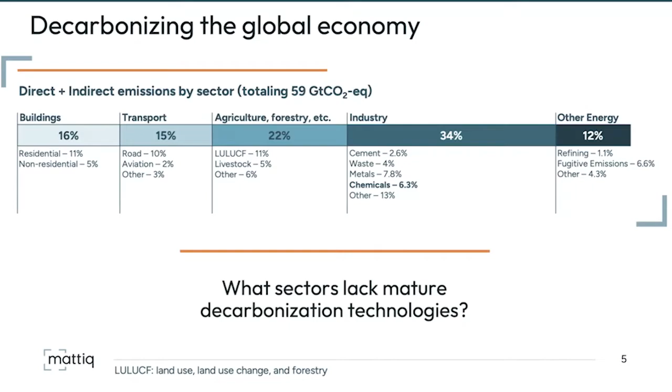So today we're gonna use green hydrogen as a case study and a benchmark for how electrification concepts and technologies can be learned from, built off of, and more broadly applied to decarbonization, specifically within the chemicals industry. As many of you know, green hydrogen, or hydrogen produced from renewable electricity, has seen tremendous growth over the past decade. And we view this massive growth in hydrogen as a precedent-setting technology that we can learn from and build off as we continue to expand decarbonization efforts within the industry.

And just for some brief background, the hydrogen markets today are massive, with about 100 million tons of hydrogen produced each year. Yet about 95% of the world's hydrogen is still produced by steam methane reforming. And steam methane reforming alone accounts for nearly 1% of global CO2 emissions, which is a huge number. Yet over the past decade, there have been massive investments from the private sector and from government agencies worldwide to increase the global market share of green hydrogen relative to gray and blue hydrogen, the dirtier forms of hydrogen.

And domestically, the US has poured resources into building the hydrogen economy, from infrastructure to technology, with policies such as the Inflation Reduction Act and the DOE's Energy Earthshot program, which highlights hydrogen as one of only 7 critical energy-related technologies for decarbonization. The technology of water electrolysis has a very long history and multiple different flavors. Liquid alkaline water electrolyzers have been in the marketplace for decades, but more recently, proton exchange membrane, or PEM electrolysis, has gained significant momentum and has captured an increasing portion of the global electrolyzer market.

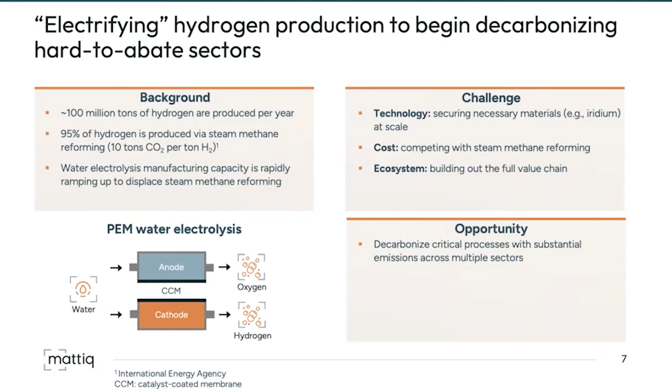Yet decarbonization within the chemicals industry will require much more than just green hydrogen. And so how can we learn from hydrogen, apply similar concepts and technologies throughout the entire chemicals industry to bring its carbon footprint from 6.3% of global greenhouse gas emissions all the way down to zero? And so today we'll provide our view on how we as an industry can collectively accomplish this. And then we'll bring it to life with a handful of case studies.

And so decarbonization of the chemicals industry is so challenging because it is so intrinsically linked to fossil carbon resources, so much so that it is often interchangeably referred to as the petrochemicals industry. And not only is the chemicals industry responsible for 6.3% of global greenhouse gas emissions, but the industry also consumes roughly 5% of global fossil carbon resources each year.

When we break down where this 5% goes, estimates vary between about 60 to 70% of those fossil carbon resources are used as a feedstock in the production of chemicals, and about 30 to 40% is used as a fuel to provide energy for performing chemical transformations, separations, etc. Given this massive reliance on fossil carbon, both as a feedstock and a fuel, we must, as a community, identify ways in which we can decouple the production of chemicals from fossil fuels and feedstocks.

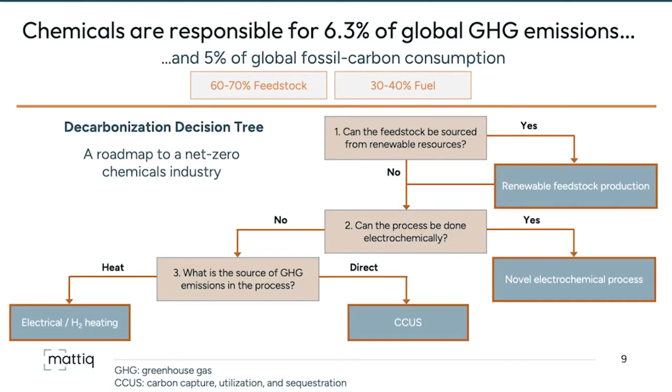So next, I will briefly touch on 2 prominent examples of electrolysis beyond water splitting that many of you have likely heard of. One of my favorite slogans these days is using the renewable electron as a reagent. With the precedent set by green hydrogen, leveraging renewable electrons as a reagent to produce hydrogen, where else can we put renewable electrons to work within the chemicals industry?

In the literature, there are really amazing examples of developing technologies to produce carbon monoxide, syngas, which is a mixture of carbon monoxide and hydrogen, ethanol, ethylene, propanol, and even formate from CO2 via CO2 electrolysis. In industry, the enthusiasm for CO2 electrolysis is less obvious, but still there. Many startups and even established corporations are entering this space.

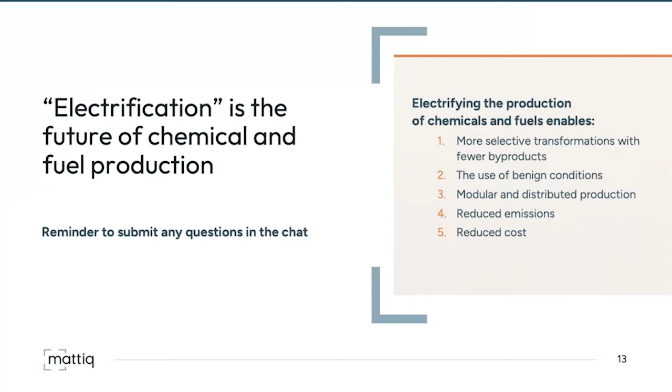So first, we'll discuss the importance of selectivity in chemical processes. And what I mean by selectivity is the ability to manipulate molecules in the way you want while avoiding side reactions that you don't want. And so we'll discuss that today in the context of sustainable aviation fuel.

So sustainable aviation fuel, or SAF, is a rapidly growing market that aims to decarbonize aviation. So of course, with aviation, we can't decarbonize that sector just by battery powered vehicles like we can with ground transportation. And the production of sustainable aviation fuel is primed for explosive growth, as aided by the US Inflation Reduction Act, which provides a $1.25 per gallon tax credit, which is quite significant.

And today, SAF is primarily produced from plant oils and restaurant grease using a process known as the HEFA process, hydroprocessed esters and fatty acids. So while this is a technologically mature process, that relies on feedstocks that can only serve about 10% or less of the aviation industry as a whole, particularly as demand for aviation fuel continues to grow in the coming years. And so it's really the lack of selectivity in the processing abilities of hydrocarbons that precludes diversification of SAF feedstocks that could allow us to achieve scale and then serve the entirety of the aviation fuel market.

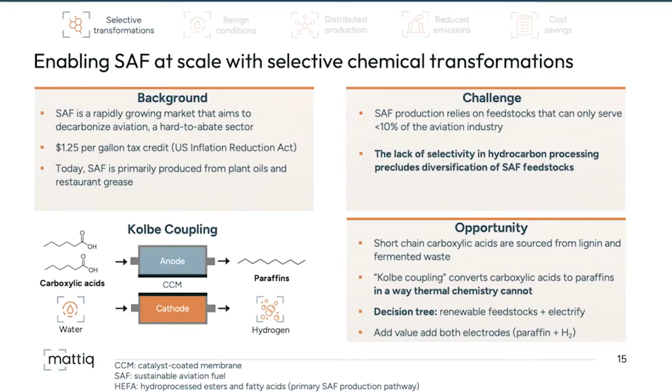All right, moving along. So with that selectivity in mind, next we'll discuss how electrochemistry can improve the processing of toxic gas H2S. So as a quick backgrounder here, we have to remove sulfur from fossil fuel feedstocks to prevent downstream SOx emissions. And we typically do this with hydrogen. So hydrogen extracts the sulfur from this sour gas or crude oil, but this results in significant production of H2S, which is a highly toxic gas. So we can't just vent this to the atmosphere. We have to process it.

And conventionally, we use what is known as the Claus process, which first fully oxidizes that H2S to sulfur dioxide in very high temperature reactors, exceeding 1,000 degrees C typically. A second step then will convert that sulfur dioxide to elemental sulfur at about 300 degrees C.

But that 1,000 degrees C step is really the problem here, where if we think back to Jordan's decarbonization decision tree, that process heat can be very carbon intensive. And in fact, about 2% of global fossil fuel demand comes from chemical process heat. And so it's reactions like this that are the source of needing those fossil fuels to run burners and get to these very, very high temperatures.

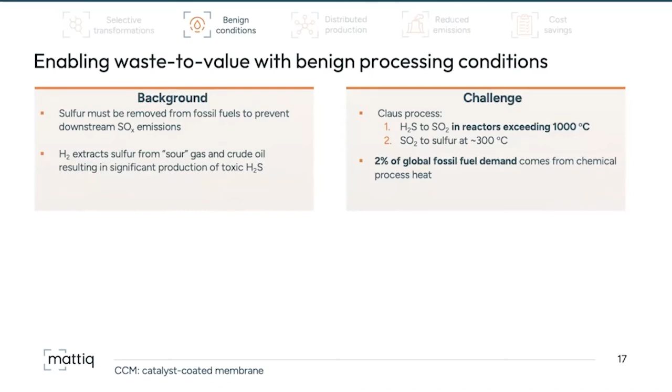So what can we do instead? We can think about H2S conversion electrochemically near ambient conditions to make hydrogen and sulfur. So what does this really allow us to do? This is the reduction of H2S to sulfur. And then at the other electrode, we are producing hydrogen.

So this allows us to do two things. One is avoid that very carbon intensive first step of the reaction. So we can avoid entirely that 1000 degrees C thermal step. And secondly, instead of wasting that hydrogen that's present in our system and producing water, what we're doing instead is extracting value from the system by producing hydrogen.

And so we can either use that clean hydrogen for on-site applications, so consider that a regeneration of that hydrogen that we can then use to further extract sulfur from our fossil fuel feedstocks, or sell that clean hydrogen out into the broader market. So ultimately, thinking back to the decision tree here, we're doing two things. We're electrifying this chemical process, and we are avoiding process heat that would be ordinarily needed.

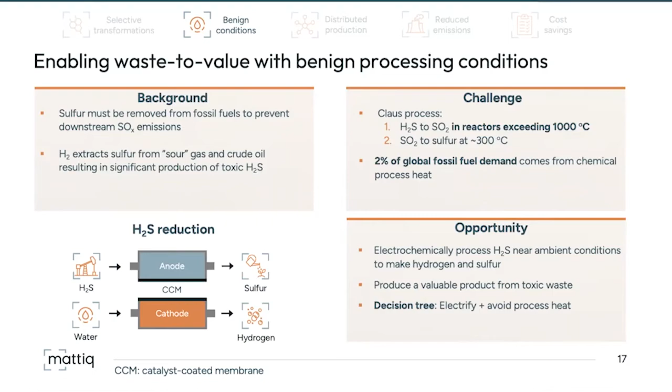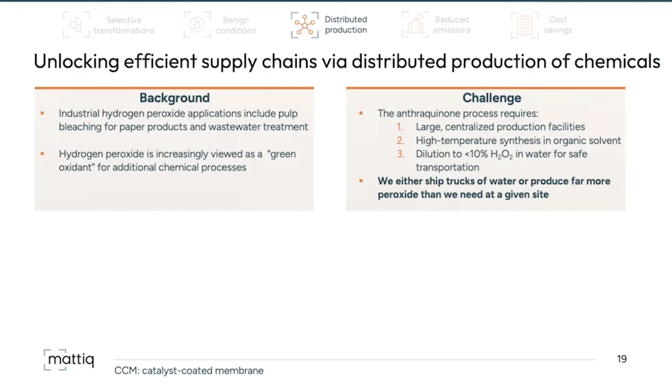But this presents a fairly large problem where we either have to ship trucks around that are mostly composed of water with dilute hydrogen peroxide, or we have to just bolt on a very large hydrogen peroxide production facility next to those pulp bleaching plants, for example. But often this results in way too big of production of hydrogen peroxide compared to what is actually needed. So ultimately, either way, we have an inefficient supply chain and production process associated with this conventional anthraquinone process.

So instead, what we can do is electrochemically produce hydrogen peroxide from water and air instead of from fossil fuel feedstocks. What this also allows us to do is achieve positive economics at smaller scales. And so that enables us to deploy modular, right-sized reactors that produce hydrogen peroxide at the point of use. So we can produce exactly how much peroxide we need at the location that it's needed. So this then allows us to eliminate supply chain inefficiencies associated with shipping around truckloads, mostly of water. So then thinking back again to this decision tree, we are using renewable feedstocks instead of fossil fuel feedstocks and using electricity to power this process.

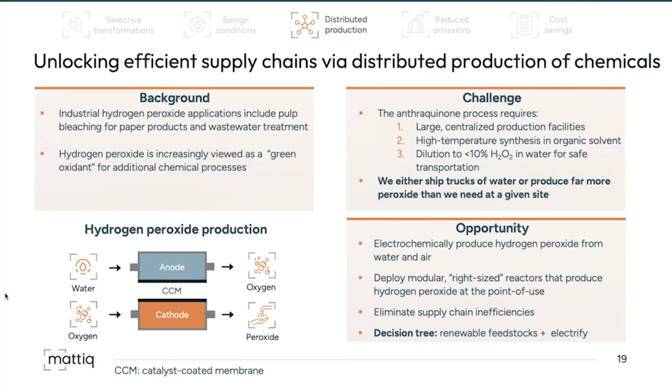All right, hope everyone's still with me.

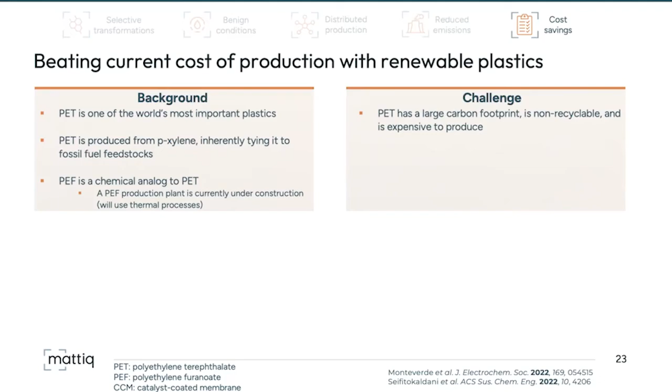So we've seen actually market validation for PEF with Avantium constructing a PEF production plant. However, they use a thermal process to produce this PEF, or rather its precursors, whereas electrochemistry can be used to drive down costs and carbon emissions even further. So specifically, what we're looking at is the electrochemical oxidation of a common biomass processing byproduct to make that PEF monomer. And so if you'd like to discuss this application in more detail and get into all the chemical structures, Jordan and I would be happy to follow up with anybody to dive in deeper on this application.

But suffice it to say, this is another example where we can add value at both electrodes and produce not just that valuable PEF precursor material, but also hydrogen at the other electrode. So this is a very common theme in electrochemistry and an alternative way to make clean hydrogen as well.

So today, PEF, this PET alternative, can be produced at a slight premium compared to PET, but recent techno-economic analyses show that with the right electrochemical system, PET production costs can be beaten by PEF production, substantially reducing the carbon footprint and costs associated with this material. And so again, this is a significant decarbonization opportunity, both in the use of renewable feedstocks and an electrified chemical process.

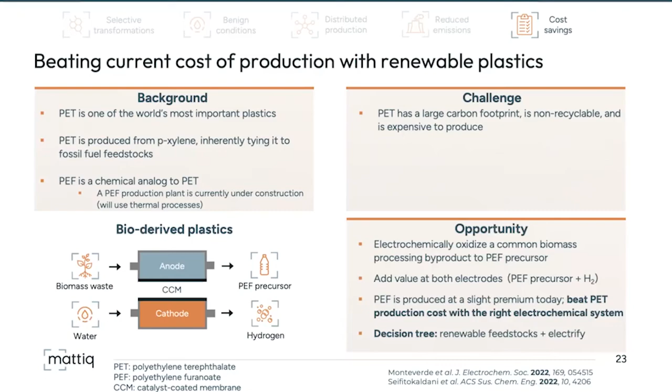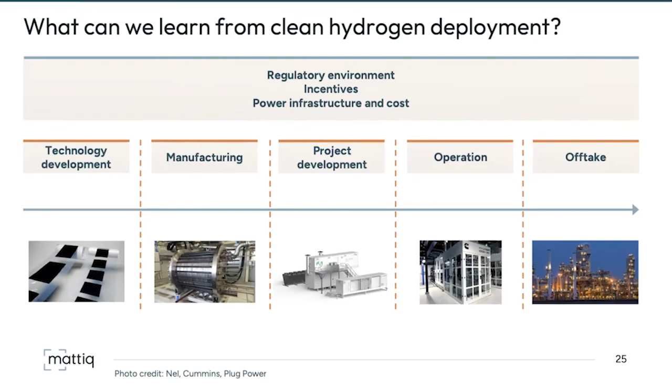And this is all happening under the rapidly evolving regulatory environment where things like the US Infrastructure Bill and the Inflation Reduction Act are providing incentives on the onshored manufacturing of electrolyzers, but also on the production of clean hydrogen itself. But there's a lot of questions that are still being answered, say on how are we sourcing the electricity used for that clean hydrogen production? And so it's been a very interesting past couple of years, and we look forward to seeing where this industry goes from here. But as we expand beyond clean hydrogen, how can we learn lessons from that first iteration and accelerate new solutions to market that go beyond hydrogen, like the ones we've discussed today?

So specifically, the technology developers will be thinking about new high-impact opportunities and developing holistic electrochemical systems and catalyst materials that will enable the efficient production of new chemicals and fuels from electrically driven processes. Manufacturers, as always, will be concerned about manufacturing at scale at low unit costs and navigating the supply chain constraints associated with the key materials they need. Project developers will be acquiring renewable power at low costs, designing projects to maximize value add, and making sure all the numbers work for these processes.

And then operators minimize electricity costs always, make efficient supply chains like the ones we discussed with hydrogen peroxide, for example, and maximize system lifetime. And ultimately, off-takers will be concerned about the carbon footprint of the products that they're actually purchasing. And so our objective really is to bring all of these different players together, including government, to make sure that we streamline commercialization and accelerate these very exciting new solutions to market.

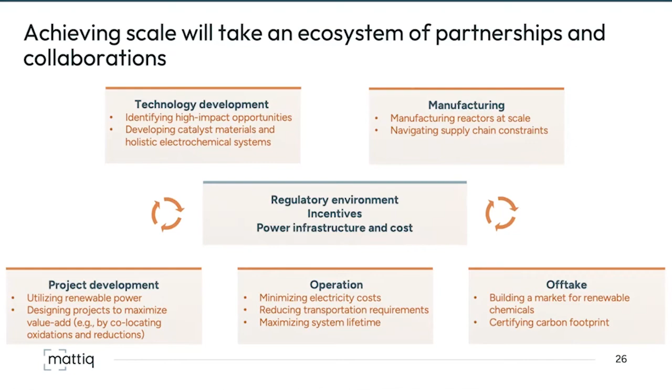So with that, I'd like to leave you with 3 key takeaways before we jump into a quick Q&A session here. We have a major opportunity at our hands, and this is not just about decarbonization, although we can address a significant portion of global emissions through the chemical sector alone. But this is also an economic opportunity where electrification enables us to run chemical processes and supply chains more efficiently so that we can cut costs and carbon.

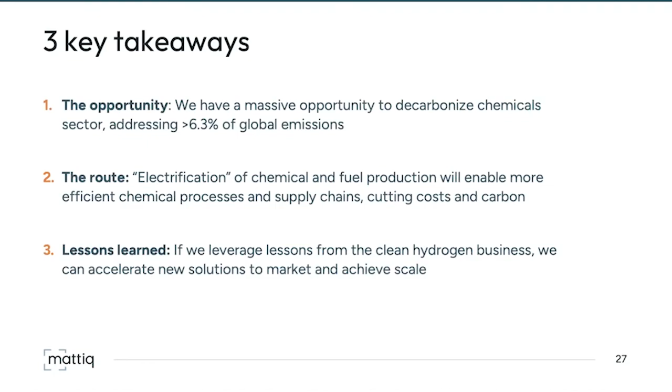And like I mentioned, we can do things with electrochemistry that we could not do with thermal chemistry, unlocking new avenues for value add. And finally, if we leverage the lessons learned from clean hydrogen so far, we can accelerate new electrochemical solutions to market that leverage renewable feedstocks and really drive that carbon footprint of the chemical sector close to zero.